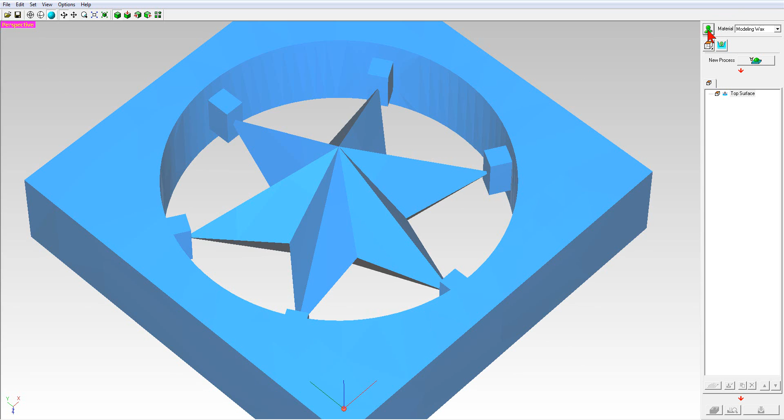Step: we'll set the origin to the center. Next step, we're going to pick two-sided, so we've got two sides. Here, margin, set these to 0.

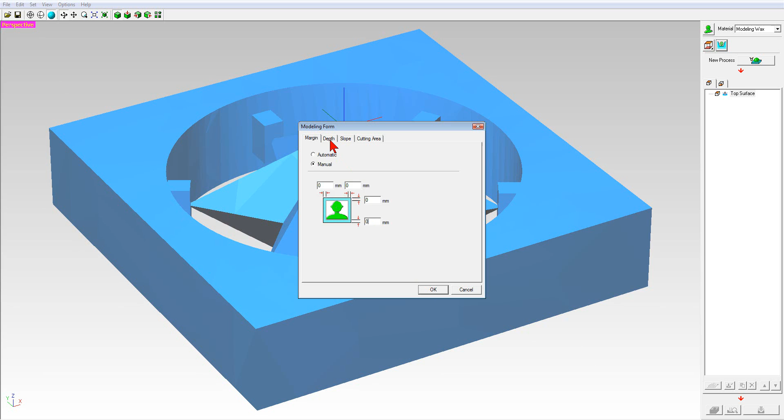And then depth. Now you can either pick the center, and that red line will go exactly to the center, and that's where it's going to stop at. So it says the model's 8 millimeters thick, by the way, so write that down.

Let's just leave this where it is for right now. You can pick center if you want and extend it later, but we'll go right now, right there.

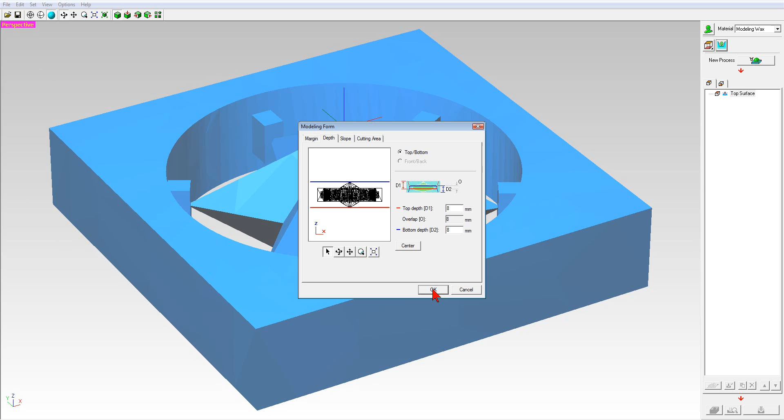New process. I'm not going to get into all this stuff, you guys do what you want to do on yours. We'll get to this one. We're going to go partial. We're going to pull that in so we're not milling anything. Don't want to cut off our supports, but get in there close. And then we're going to come here.

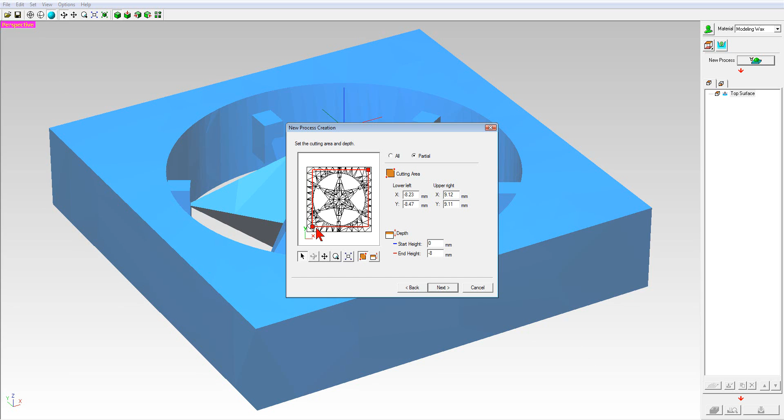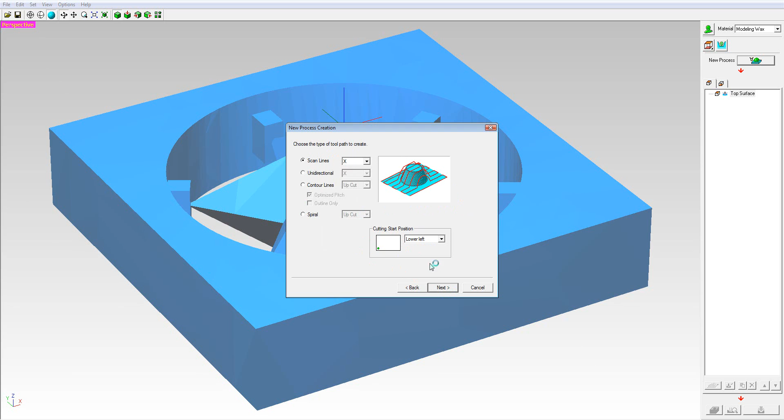Now we can take this and bring it up. It was 8 millimeters. I like to go a little bit below the center line, just a little bit below. It was 4 - it was 8, so half was 4. A little bit below the center line. That way it cuts off any swarf, whatever you're doing. Set that. Okay.

There, now come, now set the machine. First of all, we're going to Z direction. Now, model top edge. The model was 8 millimeters.

So let's just say you had a piece of wax that was 10 millimeters, so you got a 2 millimeter difference. Whatever your wax is, let's just say it's 10 and you need it at 8. So take the 8 minus it from the 10 gives you 2 millimeters. So we're going to do it as a double-sided, so we split that number in half and enter in here. So the 2 millimeters, we split it in half, gives us 1 millimeter.

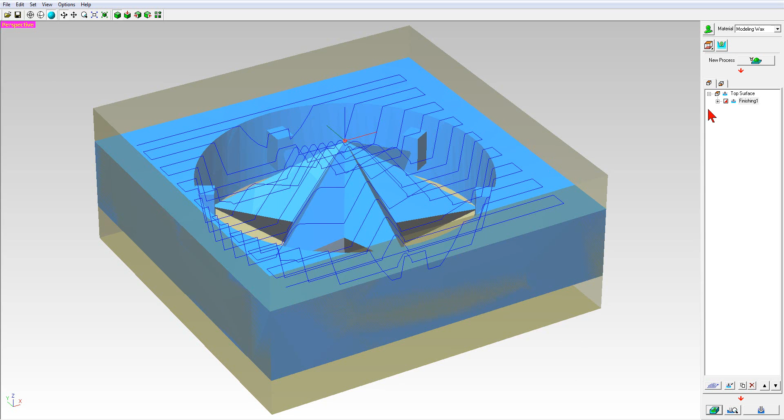So we enter 1 millimeter, meaning that it's going to cut 1 millimeter down before it even starts cutting. So you have 1 millimeter on each side, and it gives you back down to your 8 millimeter. Okay, don't forget that step.

Now we're going to set this up. The fixture somewhere around here, okay, but let's just set this up to a 40 and 50, and we're going to move this tool so it goes to the center. So there it is, basically.

Now what you want to do is put a piece of flat wax into your flip fixture, clamp it down, take your 1/8 inch end mill. And if you want to jog the machine over closer to the fixture, whatever, but anyway, by hand with the button, the down, up, down button, drill a hole all the way through the wax.

Then flip your fixture over and drill a hole about 1 millimeter into the wax and see if the two holes lined up. Now, if they don't line up, you'll see a lip there. So measure the distance that they're off, and let's just say, go with a simple number, it's about 2 millimeters.

So you're 2 millimeters off on the flip. So whatever that number is, take it, divide it in half, and then jog your Y over that amount. If it's half a millimeter or a millimeter, you're going to jog it a half, but let's just say we're off, so we made it 49, okay?

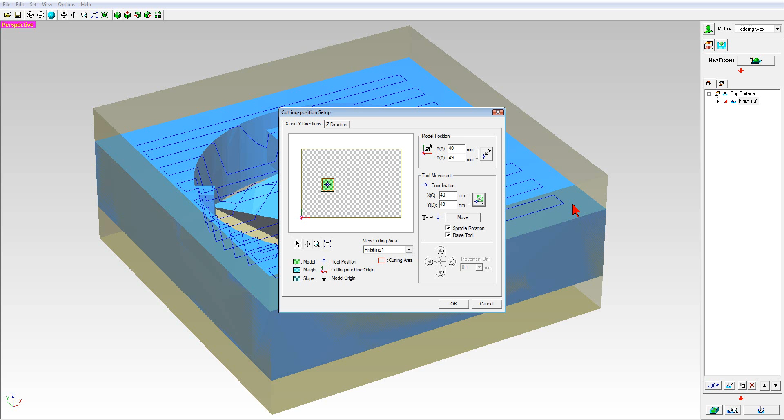Well, once you get done with that, let's just say okay, you milled it. Don't forget, then you got to go to the bottom surface, okay? You're basically going to run through the same thing that you did, except you don't have to do a hole test, okay? You don't have to do any of that.

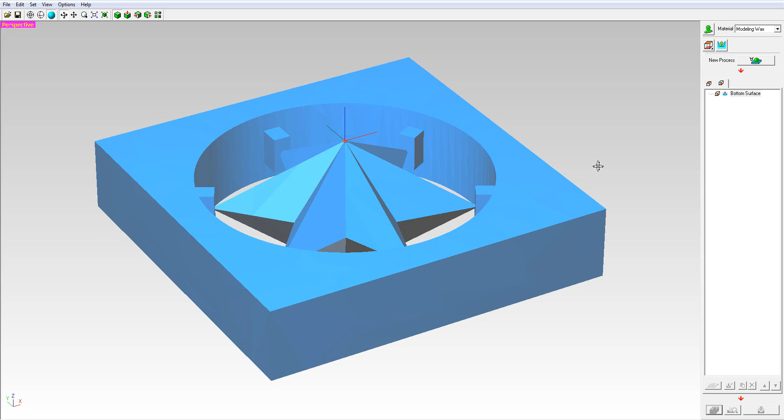The machine, when it stops, should be stopped right at the zero area that you already had selected from the first milling side. So all you have to do, I don't think you have to do much of anything, maybe double check everything, your partial milling areas. You might have to redo that again. But other than that, that should be it. Any questions, just let me know, guys.